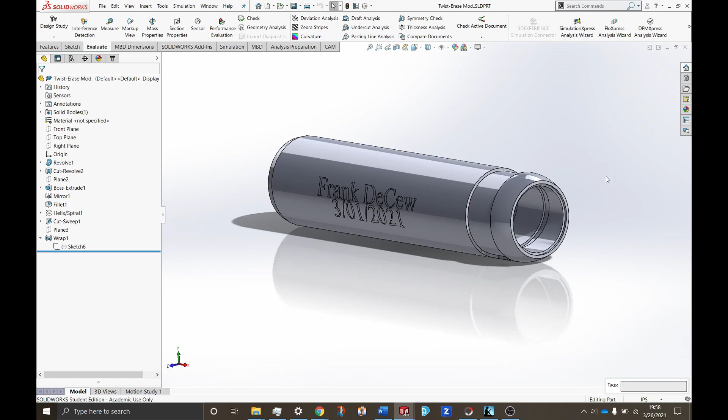Hey guys, welcome back. I just wanted to kind of do an update video talking about what I've been working on.

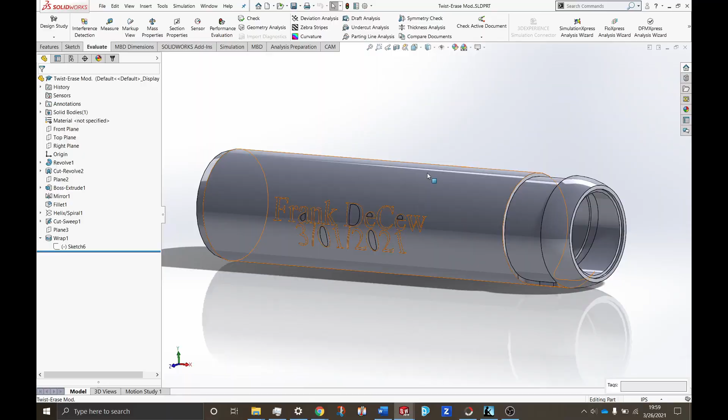So this is a 3D model of the top part of a pencil. It's a Pentel Twist-Erase. It's a mechanical pencil with an extendo eraser, I guess. Basically, a thread in this top section here and a long eraser, so you can twist it so you end up with an eraser that's 1.5 inches long instead of the 1/4 inch long.

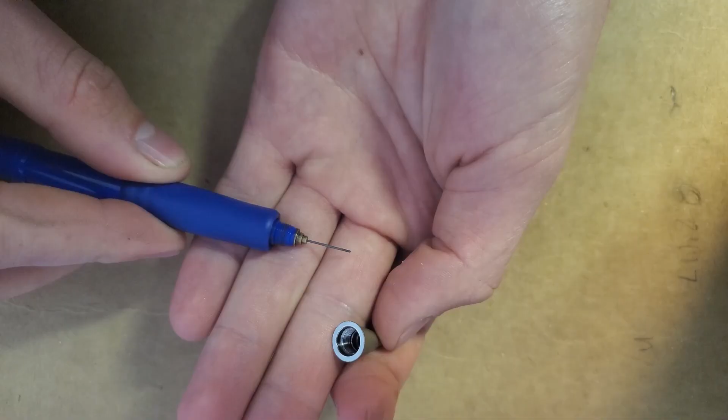I like this because it makes it a lot easier to make mistakes, I guess, and they're just nice pencils. I'll have a picture on screen, I'm sure. But of course, they're all plastic, injection molded. So I wanted to try to make a

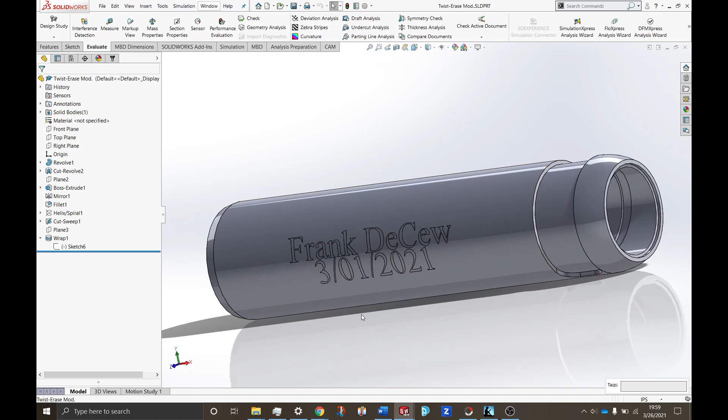metal one, aluminum, titanium, maybe even some Damascus steel at some point, because I like these pencils and I don't lose them that much. So it'd be cool to have kind of a custom one, especially if I had my name on it. I could even add my phone number maybe, so that if it's lost, it could be returned to me. So yeah, here's the 3D model of it.

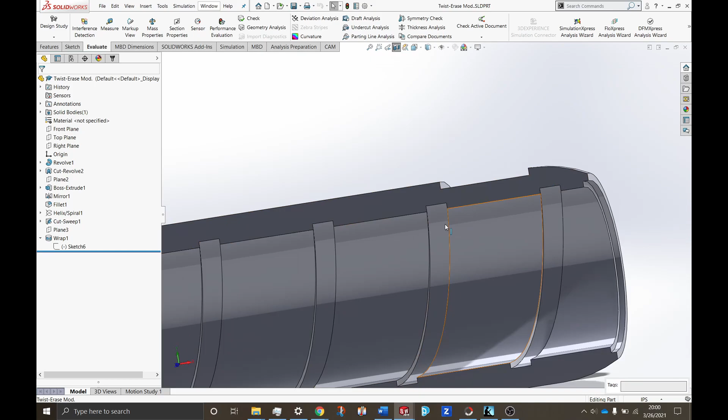It ends up being about a 4 TPI thread, and we can see it's a very unique thread form. It's no standard. So because of that, to make this part, I need to make a tap to cut the threads. So here's the 3D model of a tap I have.

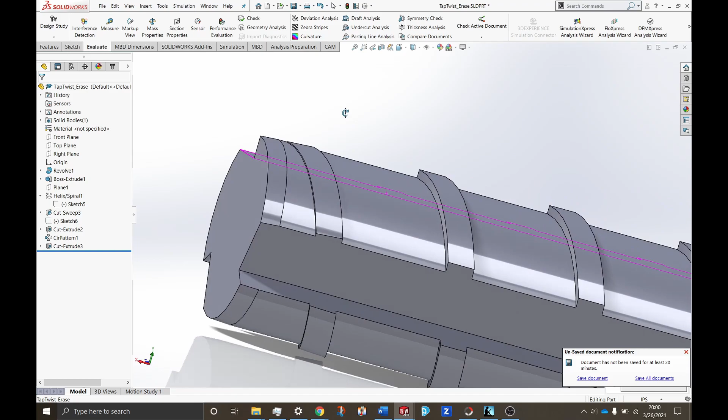I'll explain what I just had to do there in a minute, but here I'll just clean it up, get rid of that. Here you can see pretty basic tap design, slight taper in the front, and then just the thread pitch going around it with 3 flutes.

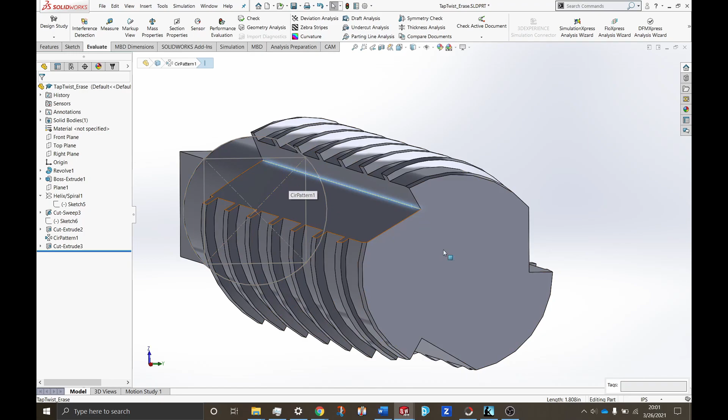This edge right here being a sharp 90 is not necessarily the strongest, but I will just cut it with a flat end mill, so it makes it easy to make, and it leaves a good cutting face here, easy to sharpen.

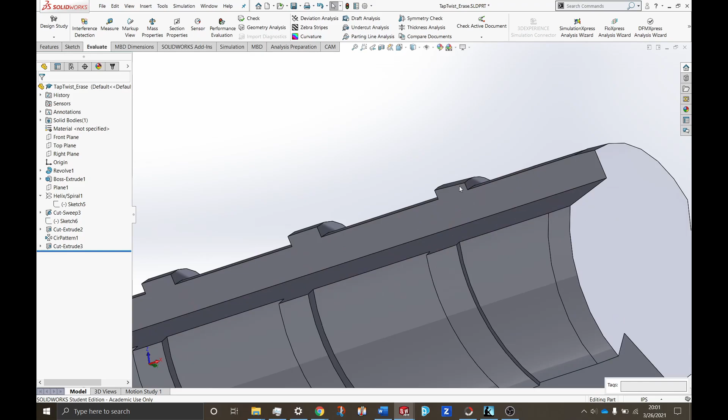It's also, as you can see, the actual amount it's going to be cutting is pretty minimal because it's just this little area right here, compared to a typical tap where it has to cut a pretty deep full thread form. This one, it's really a small area it has to cut. So I'm not too worried about the strength of it, especially being about 3/8 diameter.

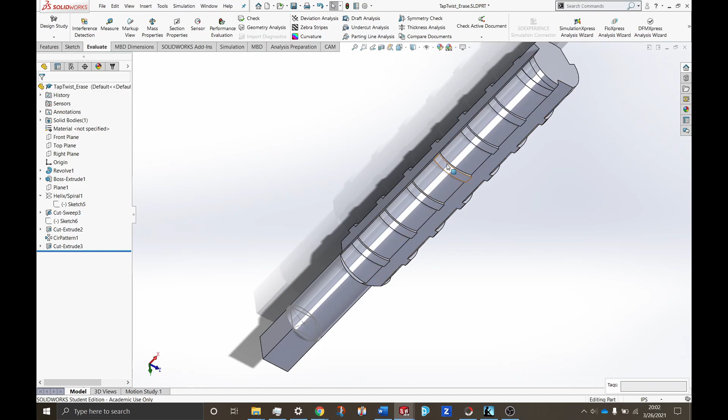It's a little bit under, which also adds some difficulty in making it because it's hard to hold. It's not a standard collet size. After doing some experimentation, it looks like I can hold it in a 5C collet. Here, we'll get rid of the thread pitch so we can just look at the blank before we cut the threads in it.

This diameter right here, we should be able to hold that in a 3/8 5C collet, which makes it easier to turn. Here's the CAM toolpaths for this. I'll be turning this on an ST10 Haas lathe. This of course could be made on a manual machine.

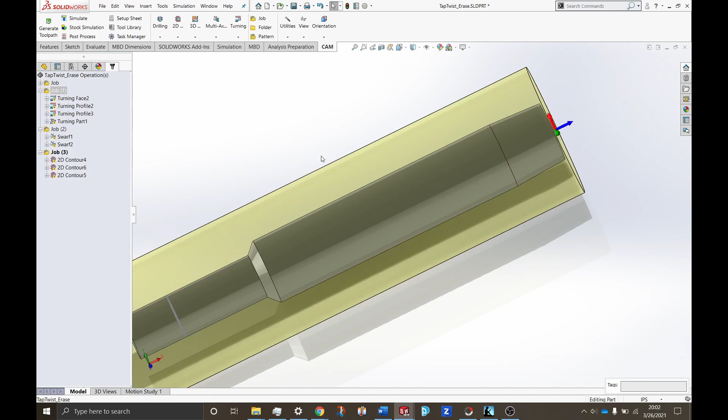I believe the issue with doing that is just cutting the thread pitch. So just doing this part, just turning the diameter with this taper on the front, obviously you can do that on a manual lathe. And then I switched to a different tool here. We'll just simulate it real quick.

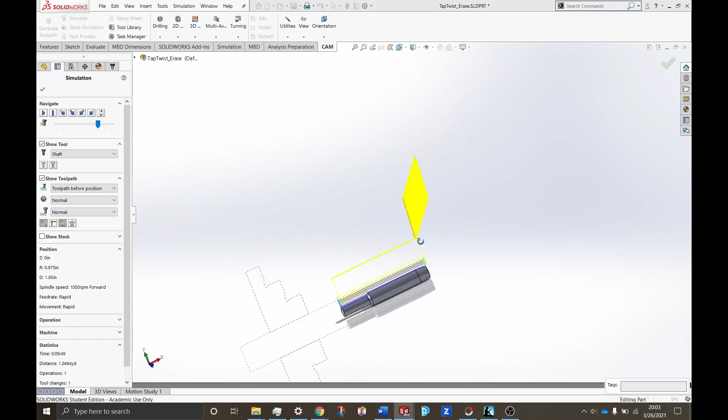You can see I use a VNMT insert or something like that. That has a, I don't know if you call that a steep angle or a shallow tip angle, so that it can reach down this face here and do it all in one operation.

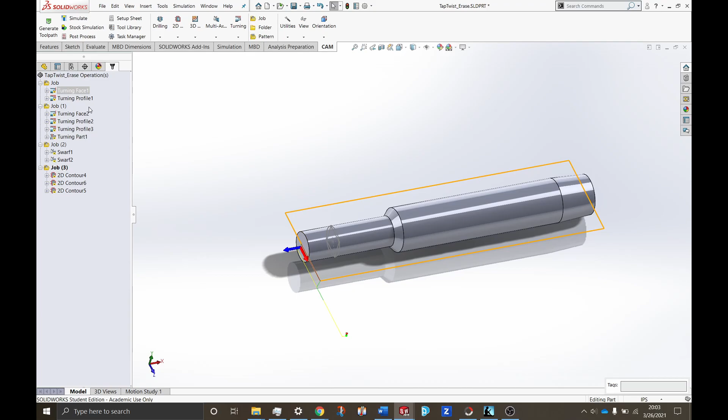I'm hoping this will make it easier to get the correct length, because the way I had this first done was that I would just face one end, turn down this 1/4 inch shank, and then take it out of the chuck and turn it around and then turn the face and then just up to this edge.

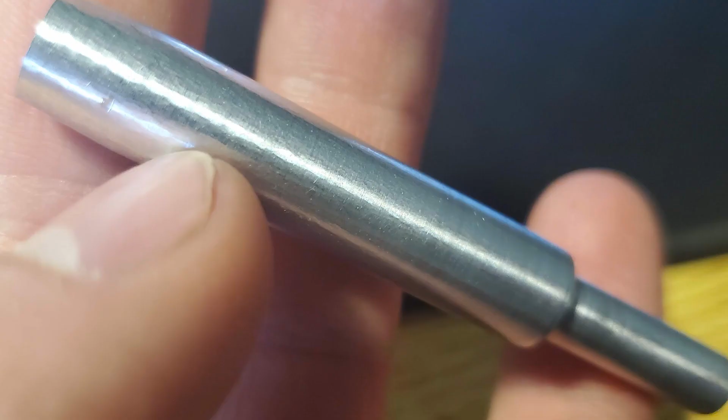I tried that on just a piece of test aluminum and it chattered a lot. I can show a picture of that here. So I'm trying to figure out a better way to do it.

Also, because of having to take it out and flip it over, getting the length correct is not particularly easy. You have to try pretty hard, and so it's just easier by doing it all in one operation here. Basically I don't have to put it in the chuck correctly and measure off correctly.

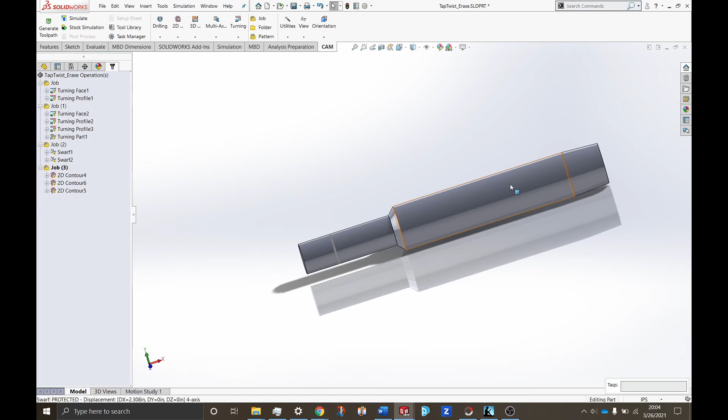So I'm going to be making this out of a piece of A2 scrap steel I got off eBay actually. I'm still going to run a couple of aluminum parts to make sure all my CAM toolpaths work and the part works. In the end, I can measure the thread pitch, make sure it threads into the original part basically.

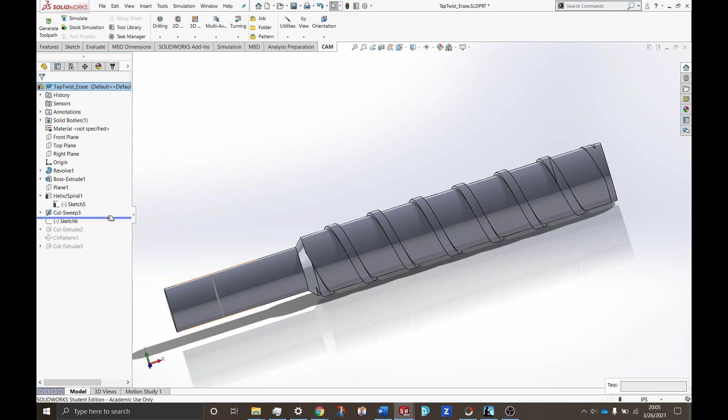I have this one weird issue. I don't know, maybe it's just the way you're expected to do it, but in HSM Works, I have to go back and forth changing my history using my tree to get all the toolpaths to work, because I can't figure out how to turn just this outer diameter without it trying to go into these threads, because it only looks at a cross section of the part. Obviously you can't just turn these like grooves because it's a spiral, not individual flanges, but HSM Works looks at it like these

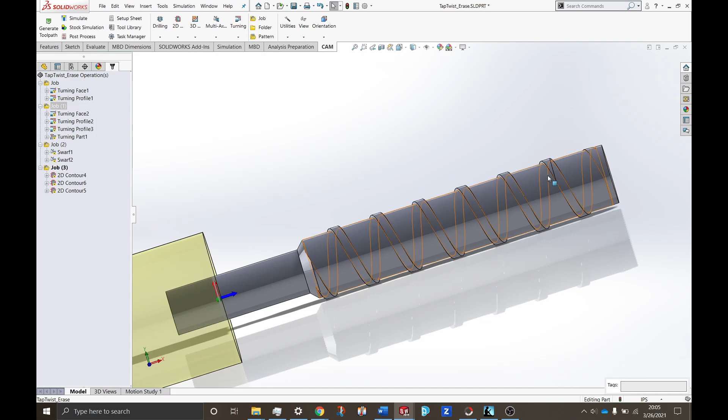are just individual grooves. So I have to go into this and drag this to different parts of the operation, like I just had it, or now I can do all the lathe toolpaths, and then I have to drag it down to do the helical swarf fourth axis passes. So here you can see those. So this is just a 3/16 end mill. We can simulate it real quick.

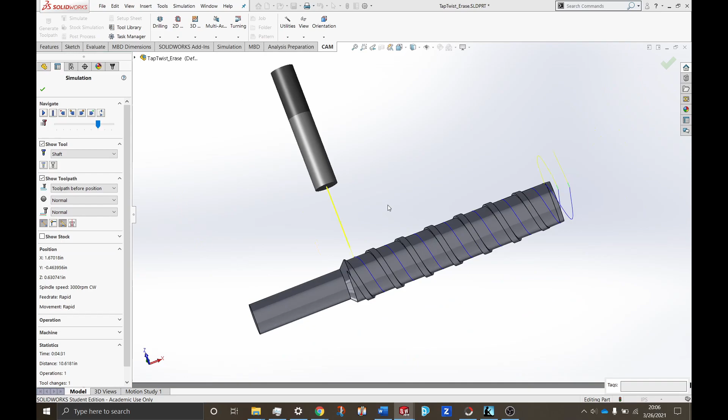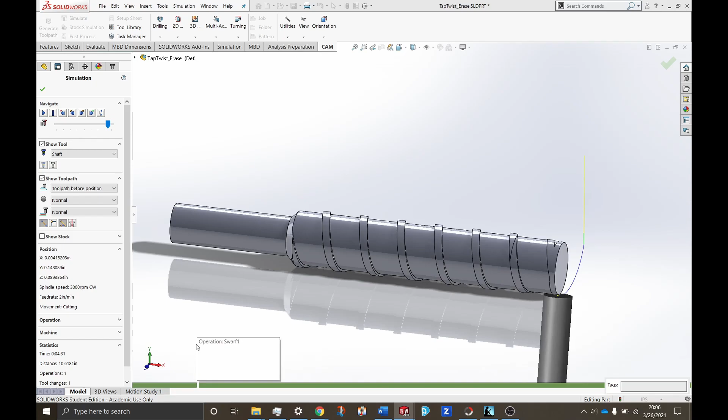Speed this up. So here you can see it's just spinning around. Oh god, that's not how you do that. It looks kind of simple, but it took me forever to figure this out. The swarf toolpath is kind of a pain, and it still does some weird stuff. It has this first kind of cut. I don't know what it thinks it's doing, and I can't figure out how to prevent it from doing that. It doesn't look like it harms anything though, so whatever.

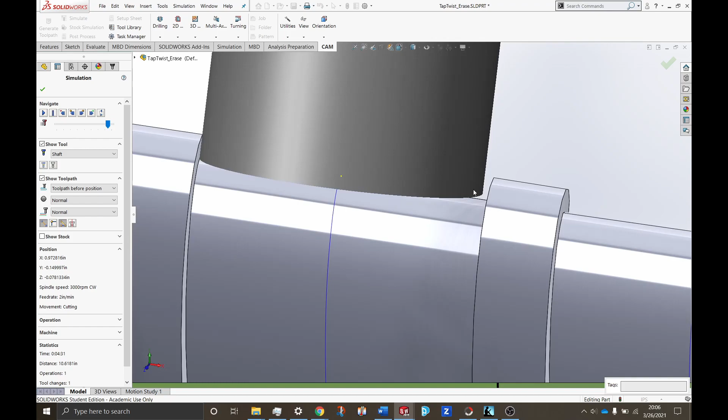And then here's the actual toolpath I want. You can see these grooves are about 200 thou, so a 3/16 end mill doesn't quite cut the full width, which is what I wanted, so I have two of these, one on either side. You can see that. Let's do a quick simulate. You can see both toolpaths running down the middle. So one and then two. This way I get a decent finish on both sides of this, at least that's the hope.

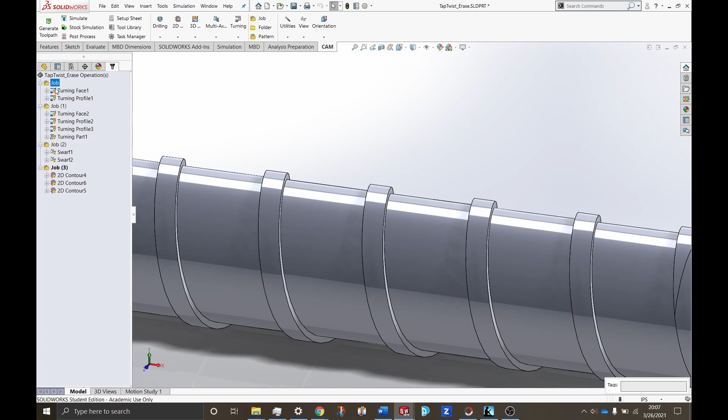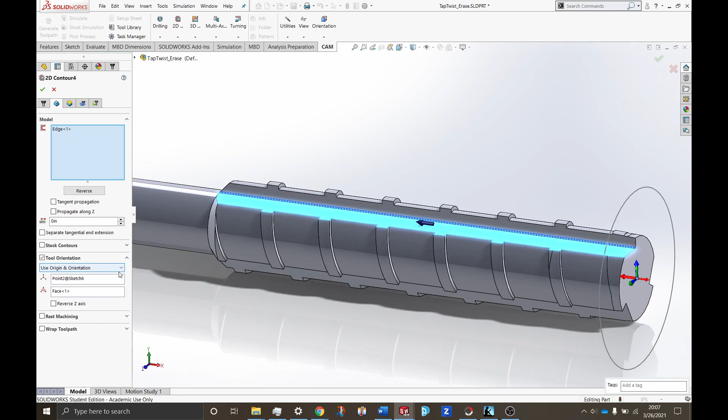But yeah, you can see I have to protect these toolpaths so they don't regenerate with the different model size. And then here I have the toolpaths for the grooves. Just 2D contours with tool orientation. So just have tool orientation on, selected a face and the origin, basically. I have not proofed this toolpath on the machines or anything like that, but it looks pretty simple. Hopefully it'll work out. Spent today putting the code onto the Haas controllers.

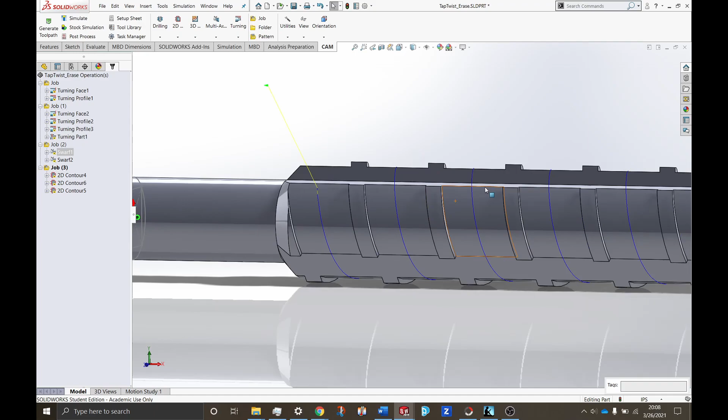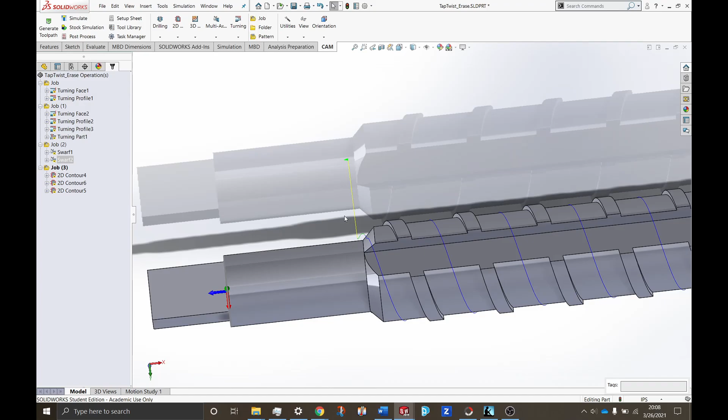It's a Haas mini mill with an A-axis. It looks like it's going to work. The one issue is this clearance. This toolpath goes up till pretty much the tool ends up being a little past this edge on center line, so we need to stick it out from the collet a little ways and then use an ER16 extended tool holder to make sure we have enough clearance against the 5C indexer. I'm still looking at that. Hopefully it's going to clear, but it's pretty close. That's something I'm going to have to figure out.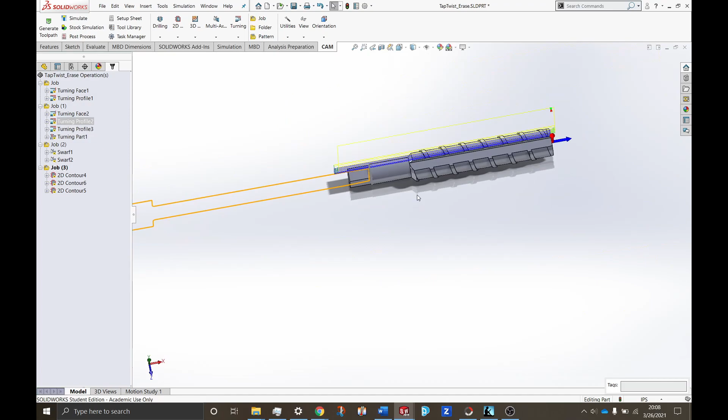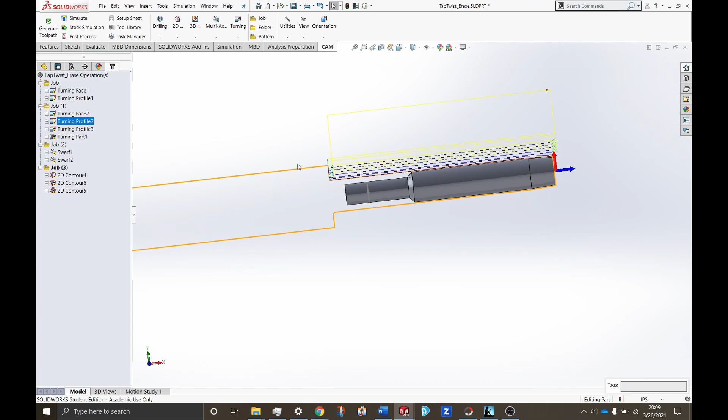It might be better in the final thing to do this turning operation, just this one, take it out, and still have a big... here, we'll go back and look at that operation with the correct model. I'm kind of thinking it through right now, but it might be worth doing just this one operation, then taking it out of the lathe, holding onto it in the A-axis of the mill, doing these two toolpaths to cut the thread, then taking it back out of the A-axis on the mill, and going back to do this operation and part it off.

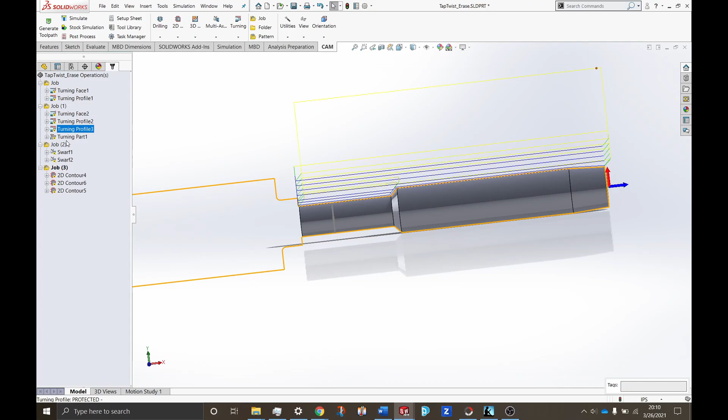That way I can hold on to it relatively sturdily. I don't have this 1/4 inch shank. I've got a pretty decent 3/8 diameter basically holding out. That might give me the most clearance. So yeah, that might be the best way to do it. So I could split up these two and then these two later, and then do these swarfs and then the 3 contours for the flutes.

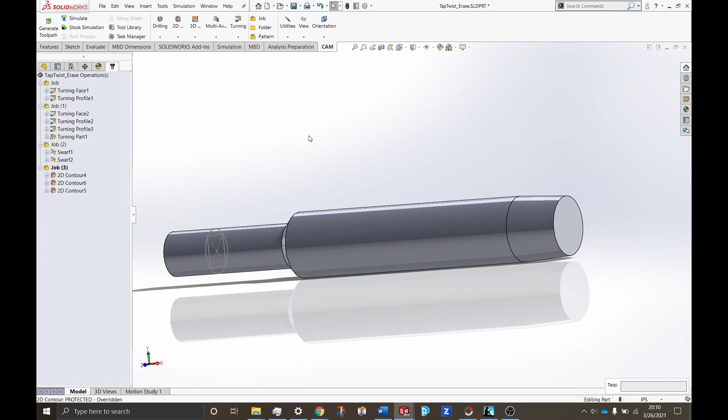This is just one of those things where the more I try to do it on the machines, the more I learn about the ways to do it and potentially better ways to do it. It's kind of an interesting project. It's kind of fun to be messing around with some more complicated tool paths. I've obviously done some basic ones, engraving stuff on my CNC router, but now being able to use industrial level CNC machines has been really cool because I'm getting to mess around with these more complicated tool paths.

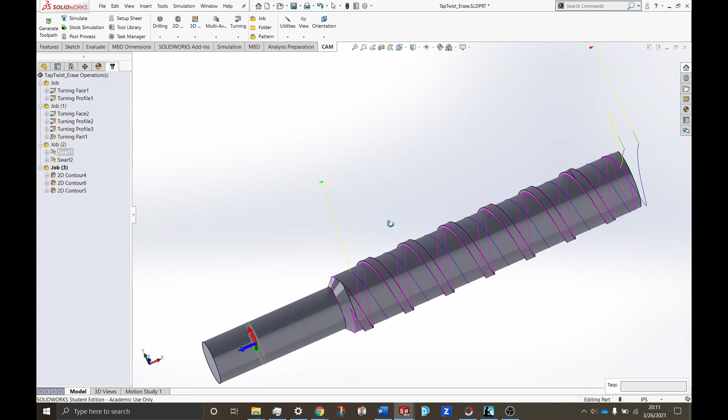Of course, I'm sure everyone's going to ask why I didn't just use a single point threading operation instead of this fourth axis swarf toolpath. That's partly because I want to use the fourth axis, and partly because I don't know how well that would work, because the form tool would have to be pretty specially ground. It would have to be ground with a lot of side clearance this way and this way, so that it doesn't bind up as the thread spirals down at this angle.

This generally isn't really something you consider because you grind slight clearances in the sides of tools anyway, but with this steep of a helix on such a small diameter, it becomes a really big issue. So the cutter would have to be really specially ground, which isn't really a problem. I could do it on my surface grinder or by hand. The other issue is this is a square thread form, so it would be a pretty big cut even if I'm only going in half a thou, which is really the best I could accurately feed in.

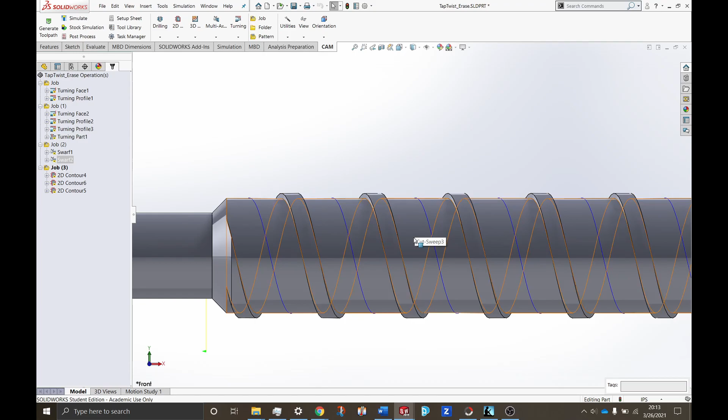I'm still cutting a 1/4 inch, or it might be closer to 200 thou width of cut, so a single chip is that wide, which is pretty big. Even if it is only half a thou deep, that's still a huge amount of force, especially on this little 3/8 diameter. So I'd probably have to put a tailstock in and do a lot of spring passes, and I don't think it would give the best surface finish or anything like that.

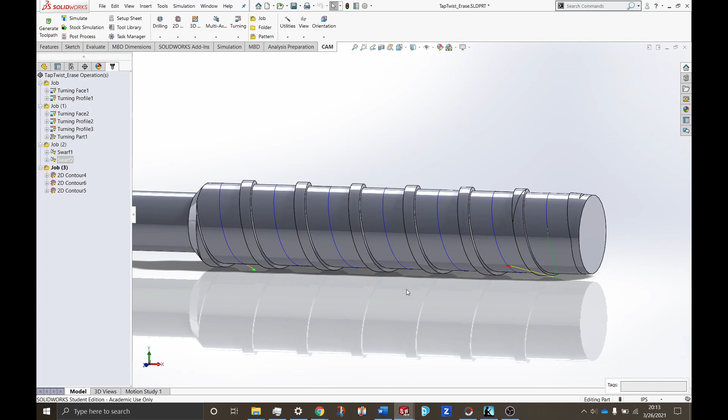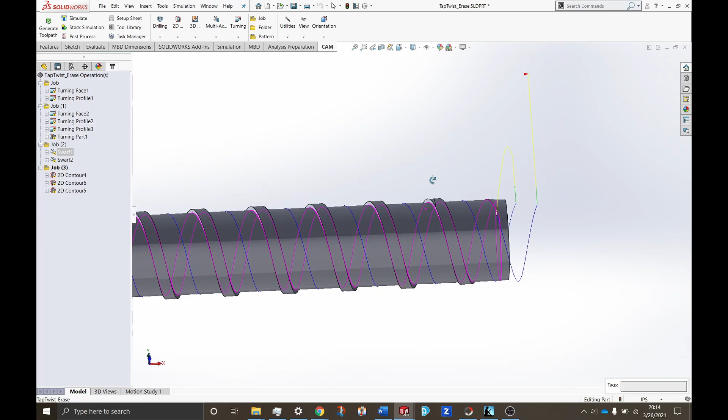So I think that this milling operation will be a lower force operation because I can change the feeds. I can go really, really slowly, feed-wise and rotational-wise, while still having a decent chip load per tooth on a 4-flute end mill. Of course, maybe I'll be eating my words once this completely fails or crashes, but this is my hope anyway right now. So yeah, that's this part.

I'll try to get some video of it. It's kind of hard to film inside the CNC machine, with so much coolant going around. And I don't think the teacher would appreciate me trying to film and run an expensive machine. Which, fair enough. I don't want to crash it because I'm trying to film. So I'll try to show pictures at least of the final parts and the process.

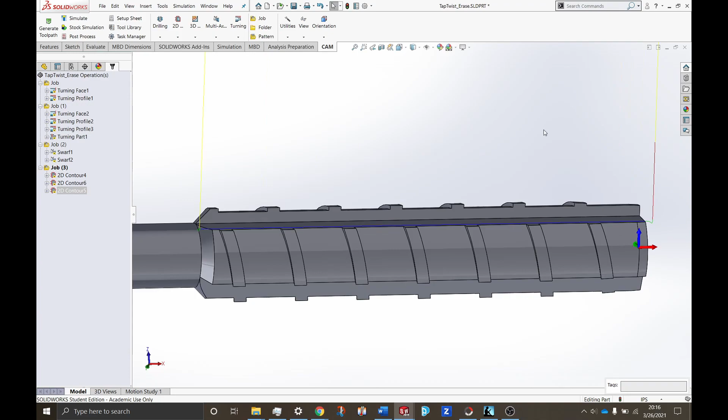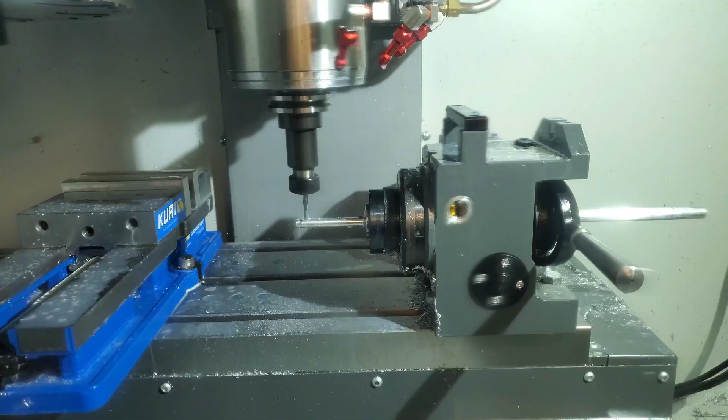Here's turning one of the aluminum prototypes on the lathe. As you can see, there's a lot of coolant everywhere. Here's the first prototype. I ended up not cutting the threads in this one because I just wanted to test out the lathe toolpaths. Here's the fourth axis cutting. Once again, another aluminum prototype before I used my expensive steel.

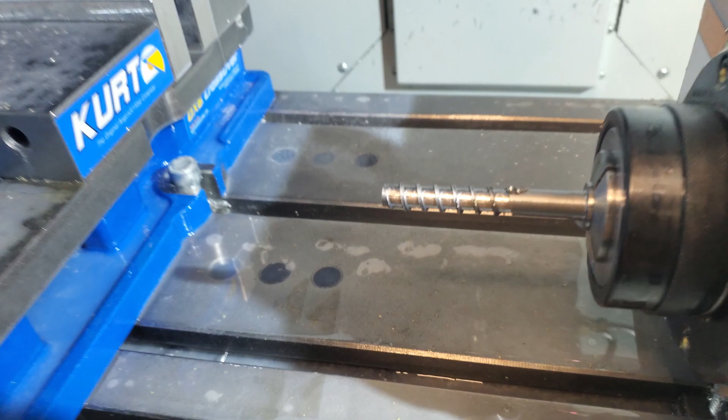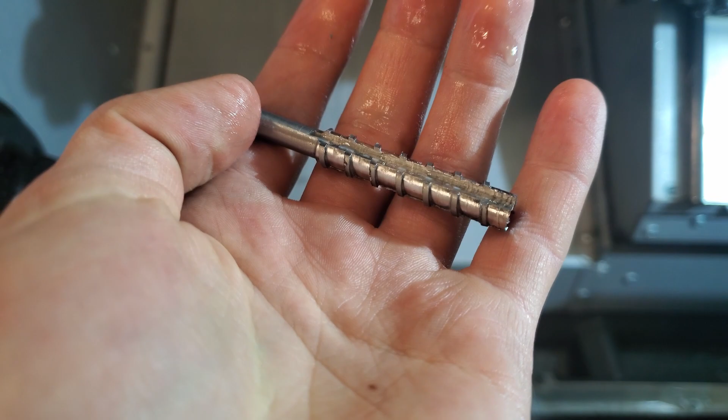Here I just finished cutting the A2 tool steel one, just the helix part, and here's the final part coming off the mill, finished cutting the helix and the cutting flutes. Here I just finished parting it off on the lathe, just turning down the shank to 1/4 inch and parting it off. As you can see, it turned out pretty well, got pretty good finishes on most of it. So now all that needs to happen is cutting the square.

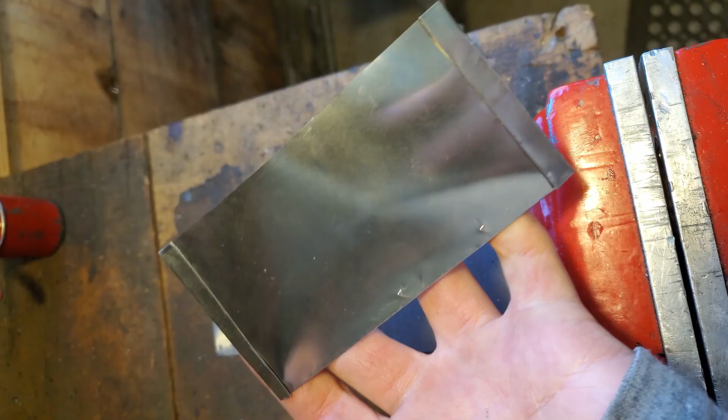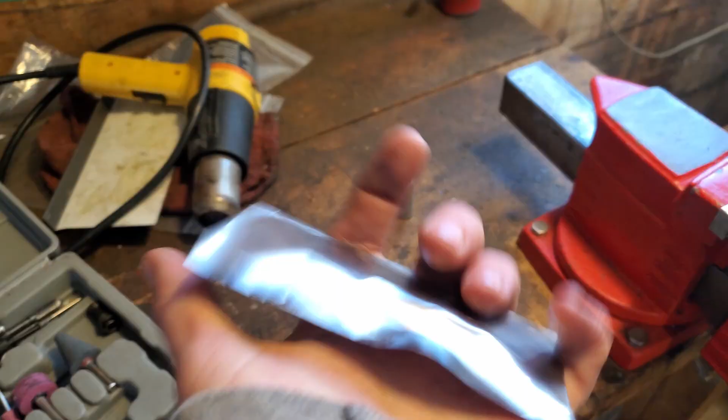Here you can see I just used a collet block on my manual mill to cut the square. It was just easier than putting it back into the CNC mill. Little stainless steel sleeve, threw a little rag in there so it burns off the oxygen as it warms up. Now I just got to seal the top. So got the folds done, hammer them tight to keep them sealed, double folds there so that it seals the best it can.

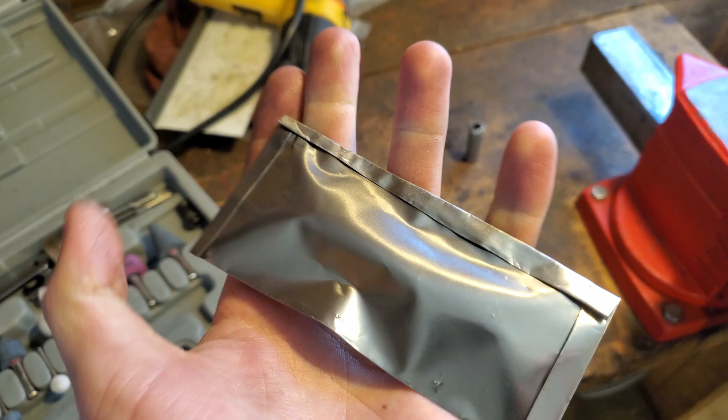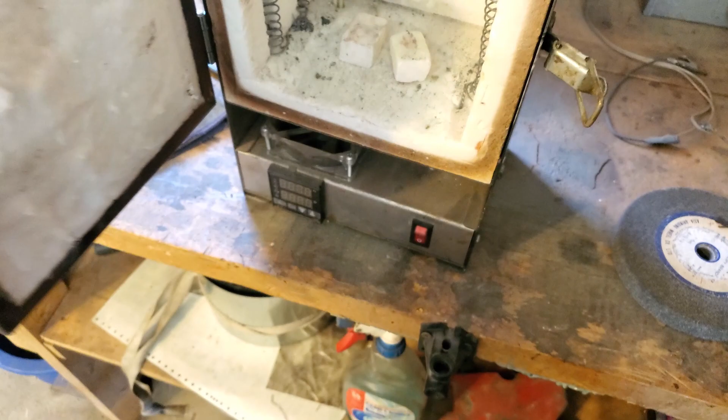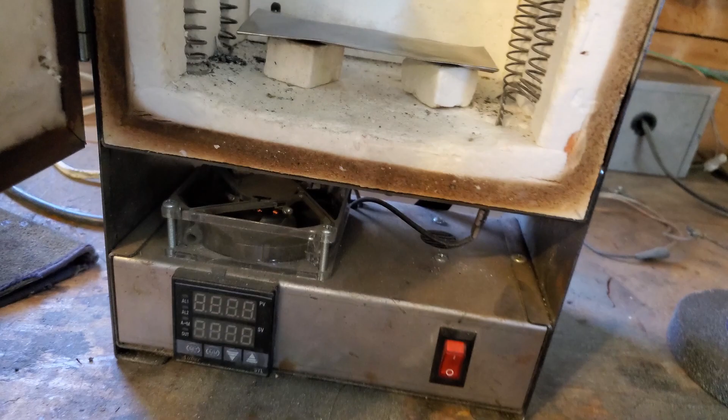A little bit of paper in there so it burns off any extra oxygen. So it goes into this little oven. I put them up on these little pieces so that it gets a little more airflow around it. Warms up a little quicker that way, or at least more evenly is the hope. And let's see whether I remember how to set this.

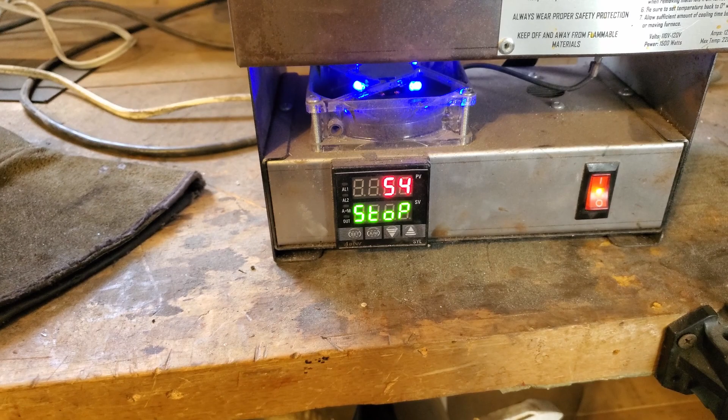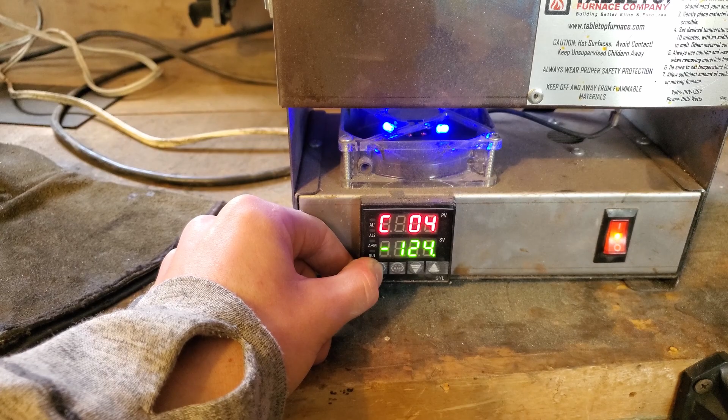I just power cycle it because then it goes back to the main menu. Kind of a weird fluke. Okay, 15 minutes. Up to 1400, hold for 20. 1700, hold for 20.

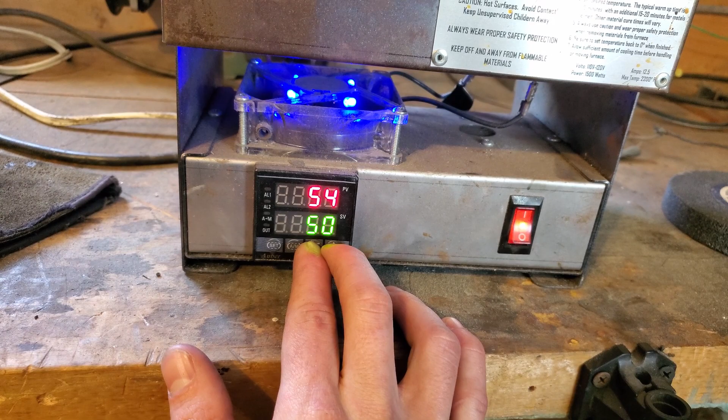Pulled these two and it runs. Once the part was at final temperature, I took it out, cut it out of the stainless steel foil, and let it cool at air temperature. Once it was all the way cooled down, I tempered it for an hour in a toaster oven.

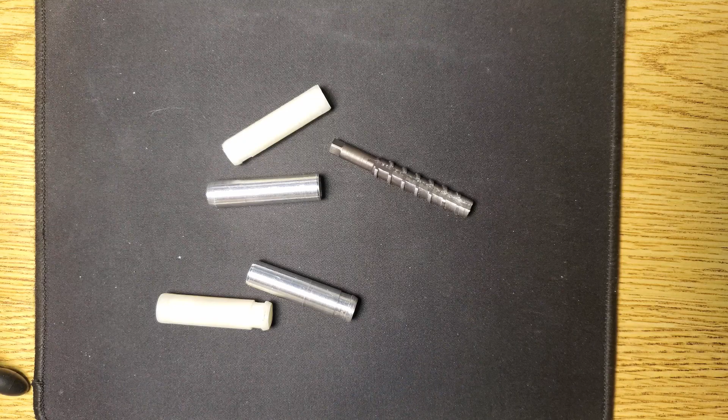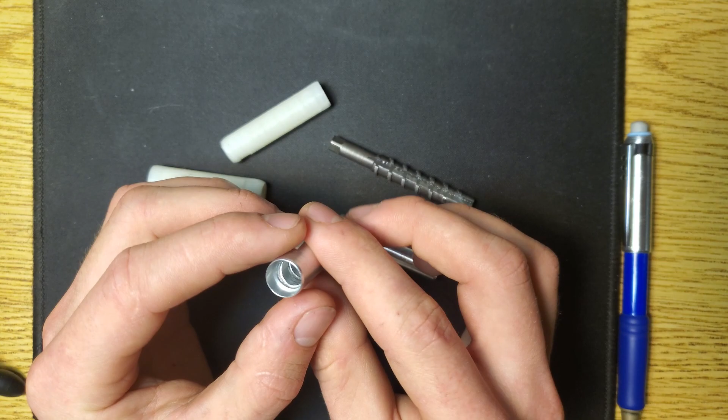Okay, so I have finished most of the pen parts. Here you can see one of them. It's got this thread in there. There's a different one. So it's got the thread in there. Yeah, so those were all cut with this tap. A2 tool steel, hardened it. It turned out pretty well. I'm actually really happy how well this turned out.

It's one of the only taps I've made that the square end and everything else survived through the hole I was tapping, and this is the only one I've needed to tap more than one hole with. So yeah, I'm really happy with it. I'm really enjoying using A2 tool steel over just like O1 or other high carbon steels I've used. The heat treating process is a little longer, though it's all hands off, you know, just throw it in the oven for a little while.

A little bit of polishing with a stone inside these cuts to polish up the teeth, and then it cuts. I also sand back the cutting teeth a little bit just so there's less friction. If I was going to use this more, I might do that to all the teeth because they definitely rub a lot. But overall, worked pretty well, as you can see, both of these. And then here's one on the pencil, and it works. See? Now, there you go.

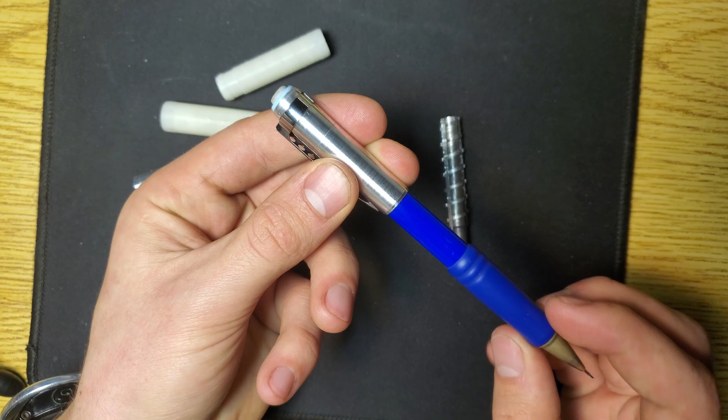You can see the one issue I have. The way that the eraser piece connects is with these two tabs. So here I should be able to pop it out easily. Take this out, clean it off a little bit. So it's got these two, let's see if we can get that focused, these two tabs, so they catch on this groove here,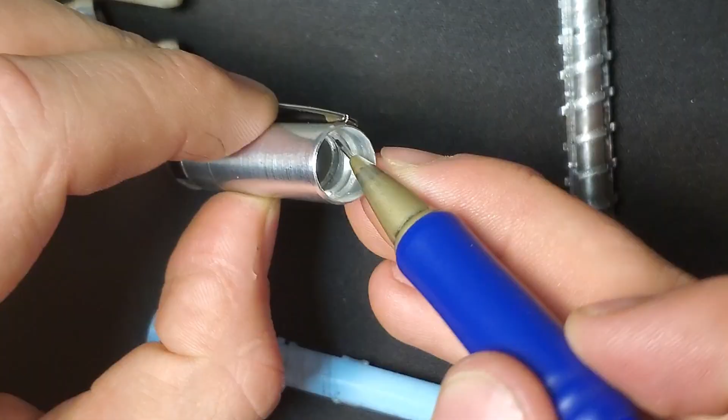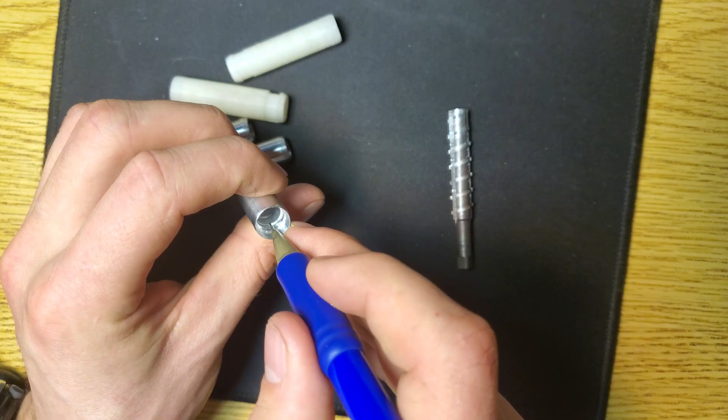but the issue is on the original pencils they have this thread stop about a quarter turn before this groove, but I can't do that because, you know, this isn't a bottoming tap, and it's just unreasonable to have a tap that has only one thread that cuts the whole shape. So this groove is not a full loop. There's a whole section, let's see if you can get that focused, from that section to about here.

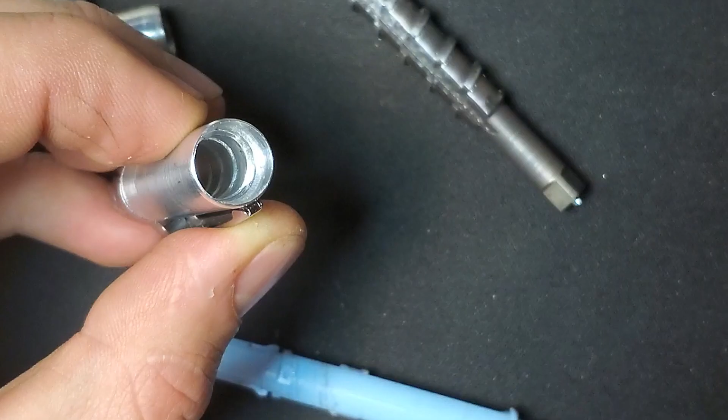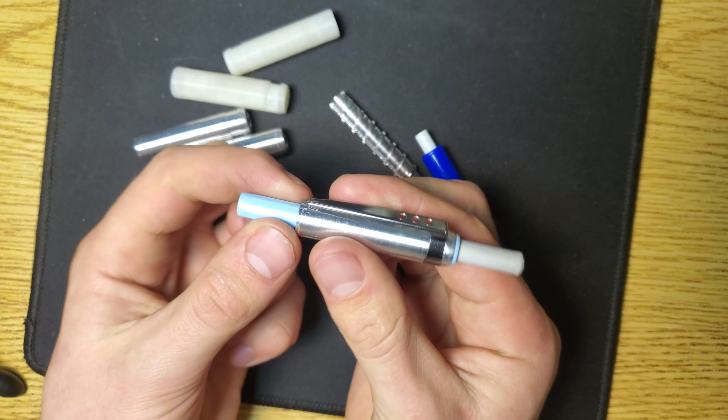So when this goes in here, it does a pretty good job. It stays in, except if you hit the wrong place, it starts unthreading itself. I'm not 100% sure how to fix it. This is kind of an unforeseen issue, but it does work pretty well. You just have to pull slightly in this direction as you spin it, which isn't really a problem, and it still works just fine. Otherwise, you're just adjusting it a little bit, not really going the full length unless you're just messing around with it. If you're just adjusting it, it's fine.

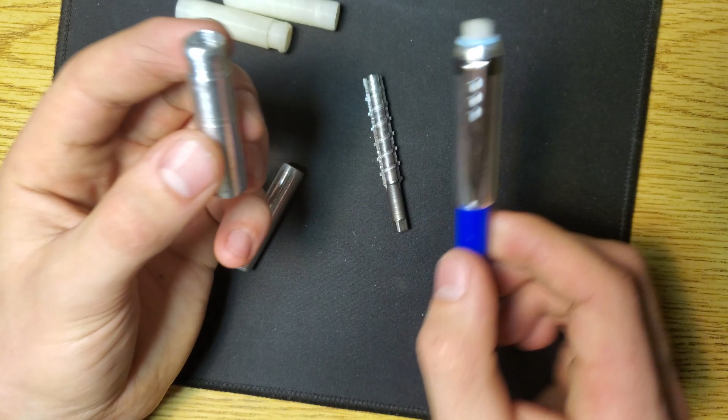It looks pretty cool with the original clip, and I just turned a slight little groove in there. Here you can see this part. This part works well too. Both these parts are fully functional. I just wanted the second one because my father wants one for his pencil, and I have the lathe set up, so it's a lot easier to run multiple. Here's the first one that worked. I didn't have the groove programmed in because I thought I was going to do it a different way, but that turned out not working.

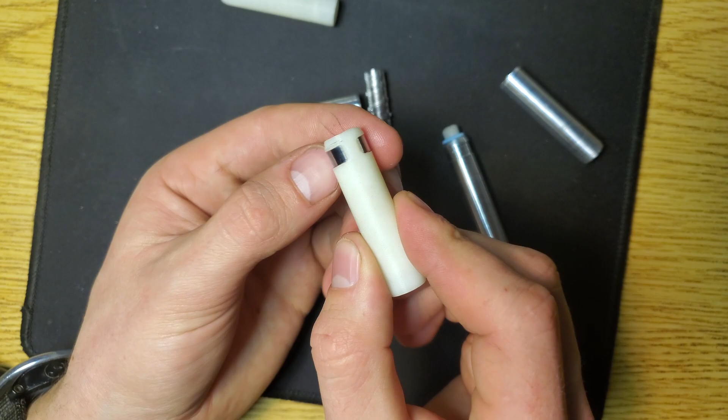I wanted to have it where it wasn't fully around the part, where it had this stop, so that the clip wouldn't rotate. Here you can see. This would be the best way to do it so it doesn't rotate, but actually, the friction's high enough, it doesn't matter. This is a 3D printed test part to make sure my model worked, and it is fully functional actually, which is kind of cool.